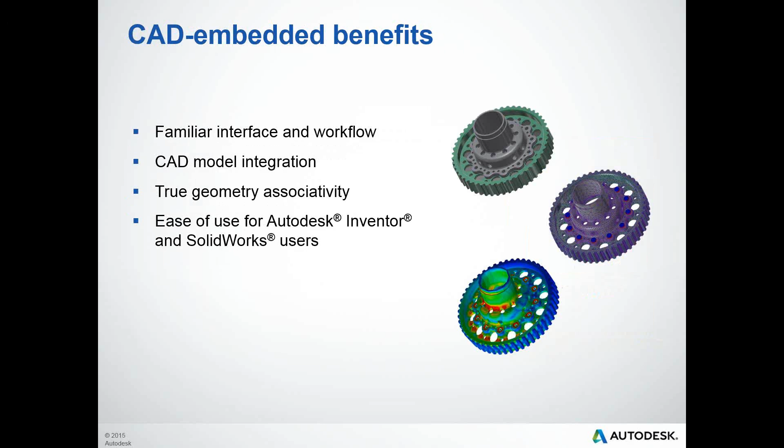Another thing I'd like to point out is the basic analysis capabilities of Nastran. We have analysis types such as linear statics, buckling, normal modes, pre-stress static and normal modes, linear steady state heat transfer, composites, assembly modeling with contact, and thermal stress.

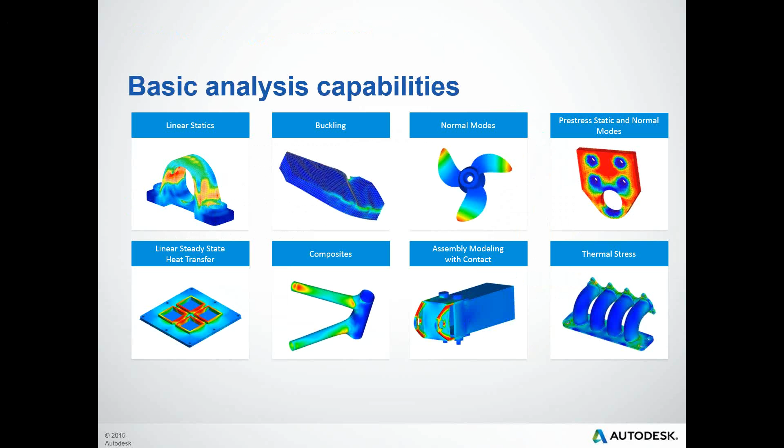In addition to the basic analysis capabilities, we also have some advanced capabilities where we can get into nonlinear statics, nonlinear transient heat transfer, nonlinear steady state heat transfer, random response, frequency response, linear and nonlinear transient response. Then we have some advanced nonlinear and hyperelastic materials, and also automated impact analysis and drop tests.

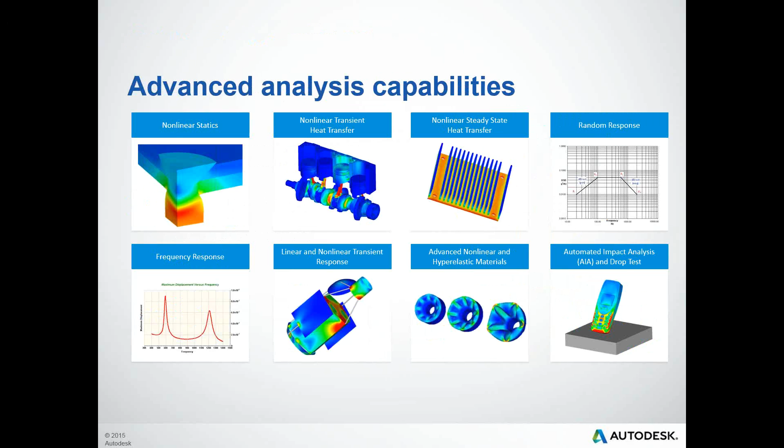So with that being said, for the people familiar with Nastran In-CAD, I want to spend a little bit of time talking about what is new in the 2016 release.

Let's start with moment loads on solid element faces. The moment load now allows you to define on solid element faces. You can apply a face moment on solid element models by selecting a face and entering the magnitude based on the axis of rotation.

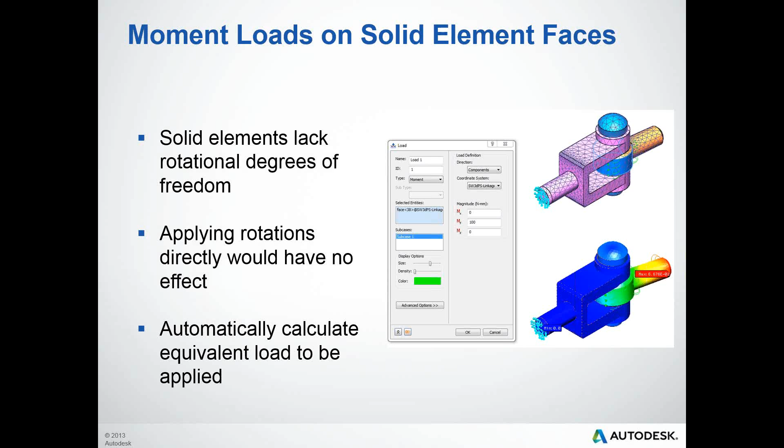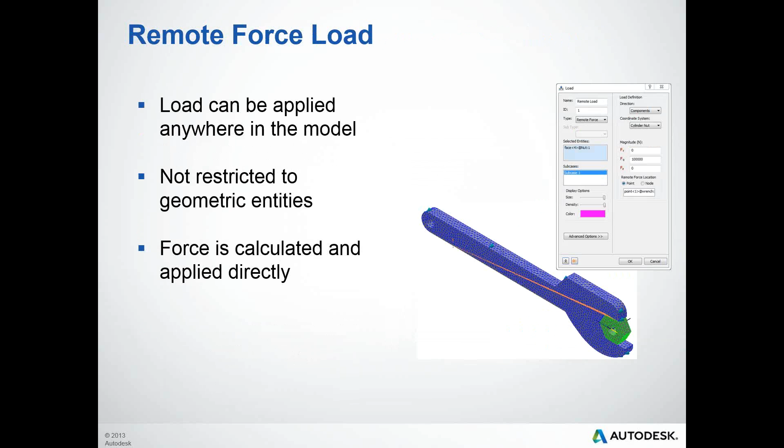Also, in regards to the remote force, which is a force that originates from a point in space, not on the model, you can apply a remote force like you apply force on the model. You can select surfaces to apply a remote force. Regardless of the surface selected, the remote force will be distributed to all its nodes.

Automatic contacts get generated, which takes the geometry contact given in the model tree from Inventor and displays the names of the bodies for much easier understanding of which parts are in contact. This detects the contacts within the tolerance specified in the analysis dialog and the geometry contact set in the model tree.

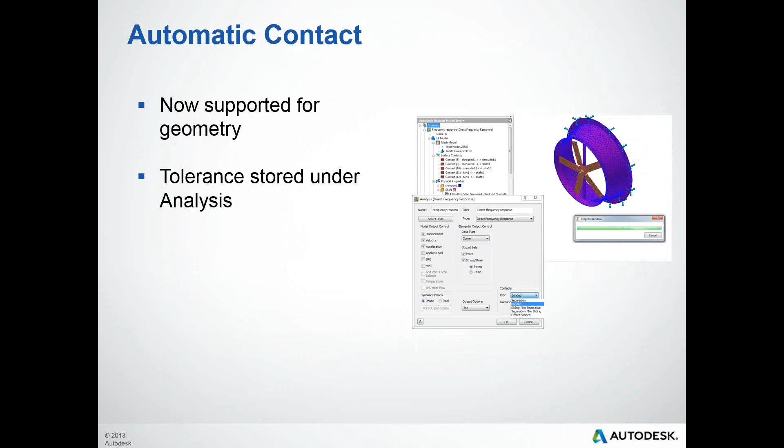We also have some improvements in regards to the meshing progress bar. Now it shows the progress of the surface mesh and the volume mesh, and also the overall progress of the meshing, so we get a nice visual showing us whenever the meshing is being applied.

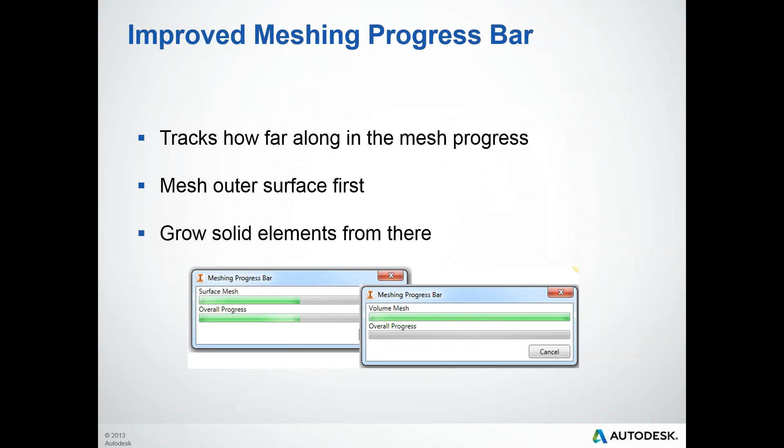Improvements have also been made to the XY plot. In this release, plotting the results with respect to nodal/element distance is now based on coordinate distance with respect to the position selected. You can now filter your results by either selecting nodes or elements.

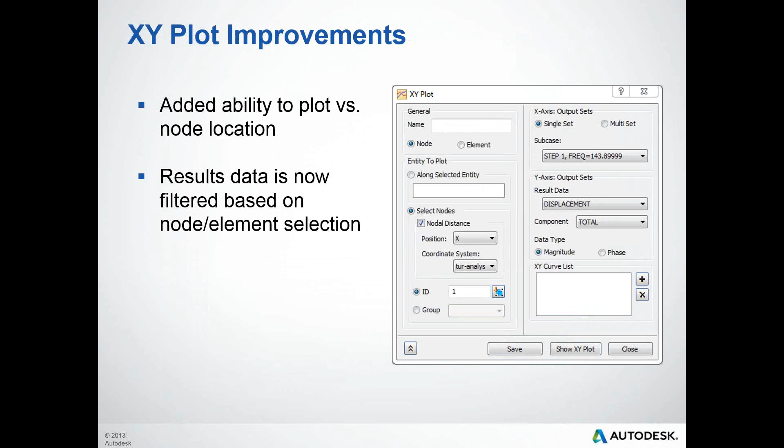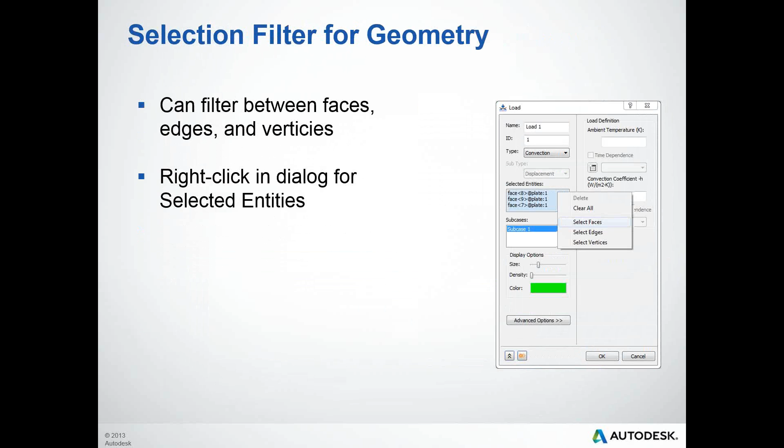Also, selection filters are added at all of the selected entities selection box. So when you right-click at the selection box, you'll notice select faces, select edges, and select vertices are listed. This will make sure that you are setting and selecting only filtered faces, edges, and vertices.

Also, with the release of Service Pack 1, you will notice that the Nastran tab has been moved to the Environment tab. And also with this Service Pack 1, we have some improved performance.

Results probing has been added to the ribbon, and this will become active. You'll notice that whenever you first go into your model, if you don't have the results already loaded, it will be grayed out. Once the results are loaded, it will then become active, so you can go around and probe different areas of your model to see the different results.

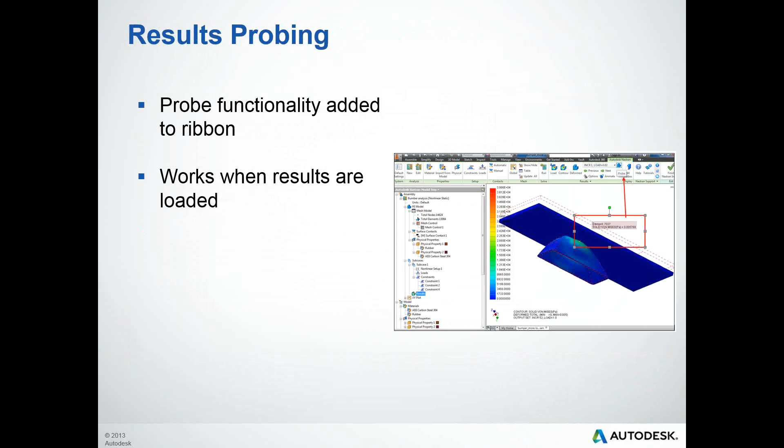Also, on previously solved models, to enable this, the only thing you need to do is go to the default settings underneath post-processing and make sure that automatically load results is checked.

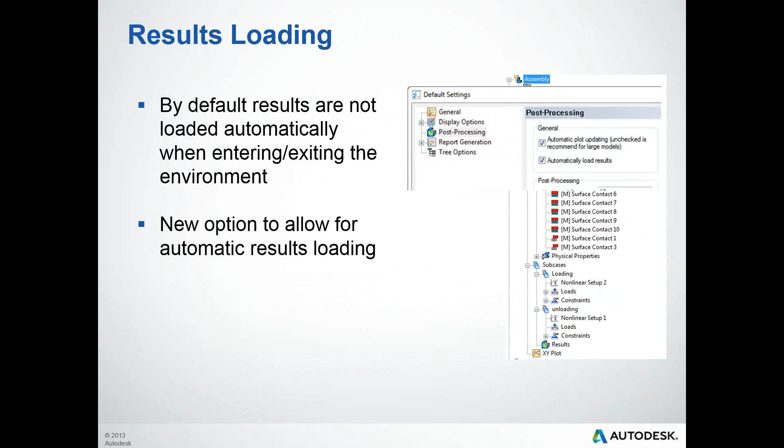Also, in regards to units, there's easy access to define units for the analysis at the browser. You can double-click the units button in the browser tree. By default, that takes the units set from the CAD system, and you also have the option to go in and override any of these settings.

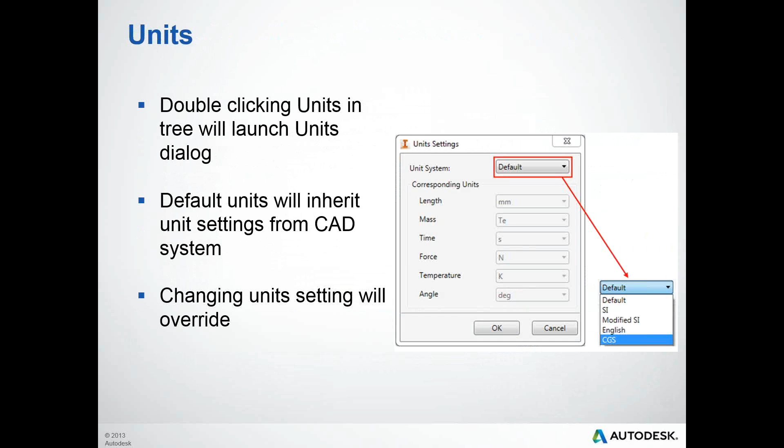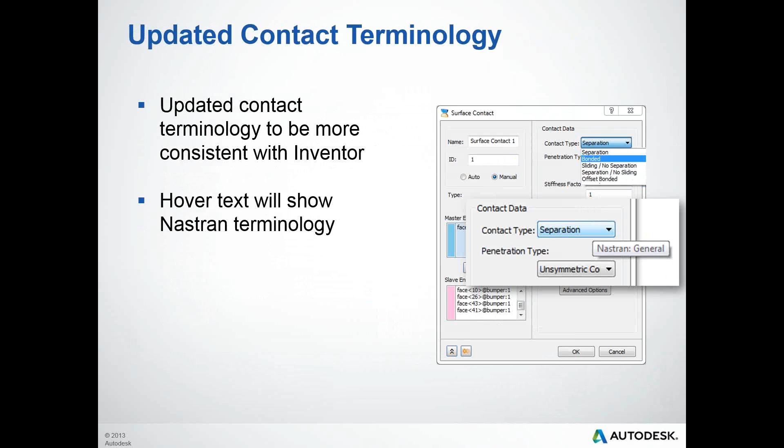Another nice little addition they've made is they've updated the terminology to be more consistent with Inventor. You'll notice that even when you hover over one of these, say any of this terminology, a pop-up will show the actual Nastran terminology.

Now this is a great thing here. The material database of Autodesk Inventor will automatically get loaded whenever you're selecting a material. Also, if you have some custom libraries that you've set up, you can import those as well, whether it be an XML or an SLDMAT file.

You can load those to utilize in Nastran. Another thing they've done is they've enhanced the factor of safety template, so now the scale is automatically reversed to show the lowest factor of safety in red.

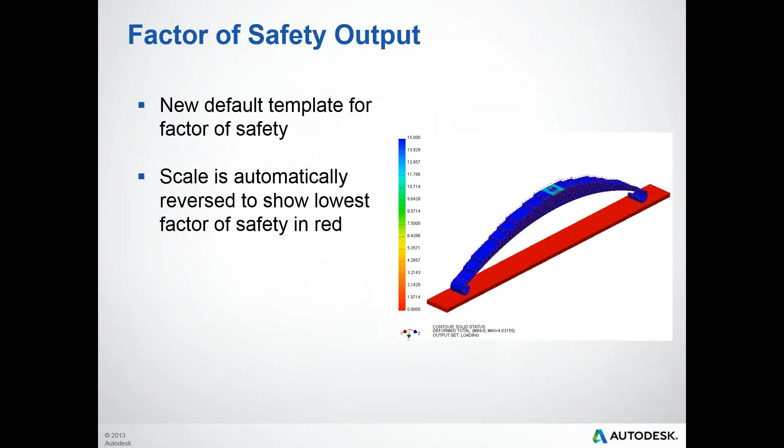Now with those new additions made to the 2016 release, what I'd like to do now is actually jump into Inventor, and let's go through and set up a model in Nastran, and let's see some of the results and the ease of use that Nastran gives us.

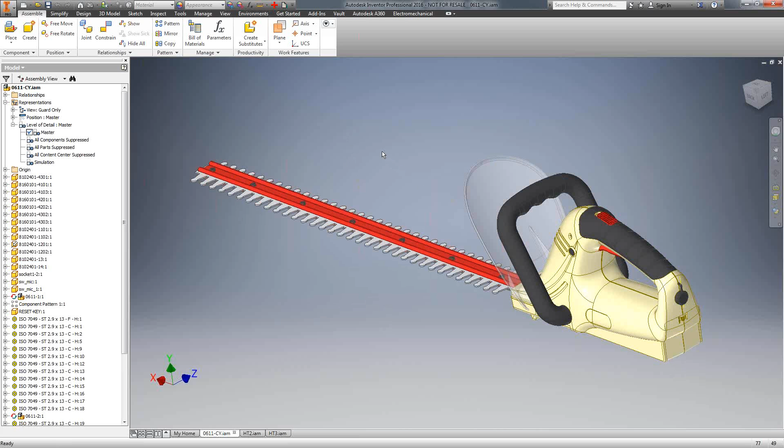Now you'll notice that I have a hedge trimmer, but today what I want to focus on is actually the guard here. This guard is made of a thin plastic, and typical load conditions on the part can cause a large amount of displacement.

So what we're going to end up doing is I'm actually going to perform a non-linear static study so that we can get some high fidelity results.

Now you'll notice that I'm still in Inventor. We have a Nastran ribbon up at the top. So the first thing I want to do is start a new analysis. I'm going to give it a name, and I want to choose the type of analysis we're going to perform. We have a lot of different types to choose from, but for this one, we're going to choose nonlinear static.

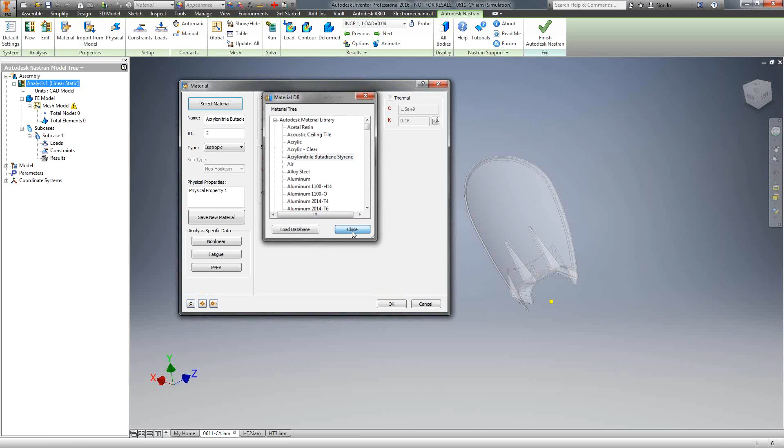Okay, and then I'm going to set up a material, and I'm going to select this material from the Autodesk Material Library. For this particular one, I'm going to choose ABS plastic here. Okay, let's cancel this just for a second.

Guard, static, okay, and let's try this again. Let's see if it's going to let me edit this. There we go. So we got a nonlinear static.

Next, I want to choose my material. Okay, and if I wanted to rename this so we don't have that long name here, I'll just abbreviate it. Okay, and you'll notice in my browser, we have our model and our model tree here.

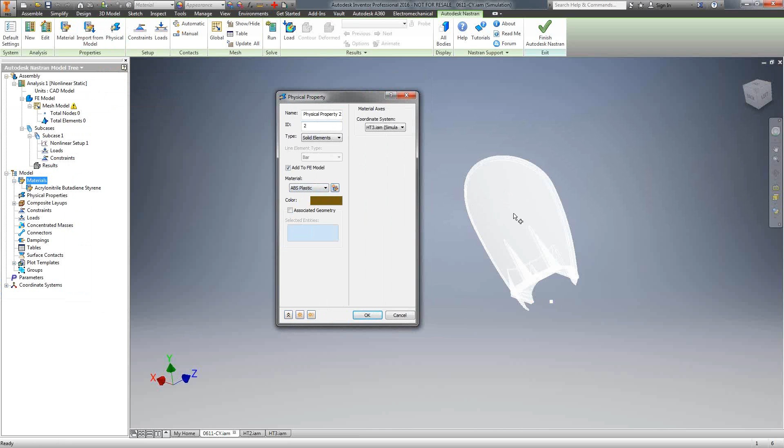Let's go through this. Okay, there we have it. Then next, I want to go to my physical properties. This is where I want to assign that ABS plastic here to my associated geometry, so you'll notice just my guard.

And then also, let's go in here and make sure everything's selected. Okay, all that's set up. And then also, let's go in and edit this here.

Actually, for this one, I want to run a specific nonlinear material data, so I can go here and set the type as plastic. Let's say for this one that I know that this material's yield point is 40 megapascals, and I'm just going to use a simple 2-point curve.

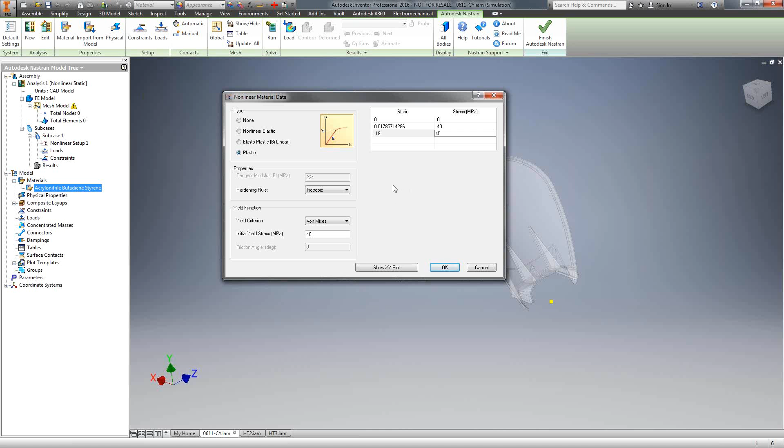And then what I can do here, let's say I'm going to use the two-point curve to define the behavior of the material, and then I can take a look at this two-point curve, and I can notice that the material softens greatly after it reaches its yield point.

Okay, once we have all that set up, the next thing I would want to do is maybe control some of the mesh on the element size, so I'm just going to go ahead and set this to 6.

And then also, the real power of the nonlinear analysis solver is actually, we can take a look at the setup here, and what I can do is define the number of iterations. So what this does is the solver will apply...

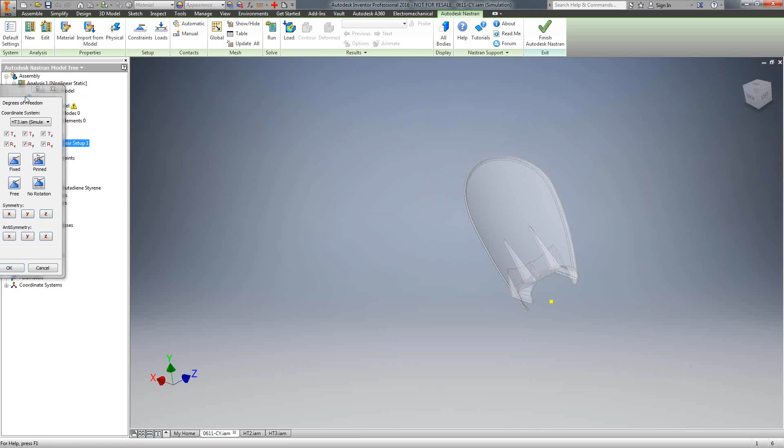...whenever I go in and set up some constraints and loads, it will actually apply, let's say — so we have a real world scenario — where this guard mounts to the trimmer, I'm going to go ahead and fix the bottom here.

So we have those two fixed, and then I want to add a load going to the front of this guard at negative 333 newtons, which is going to be somewhere around 75 pounds.

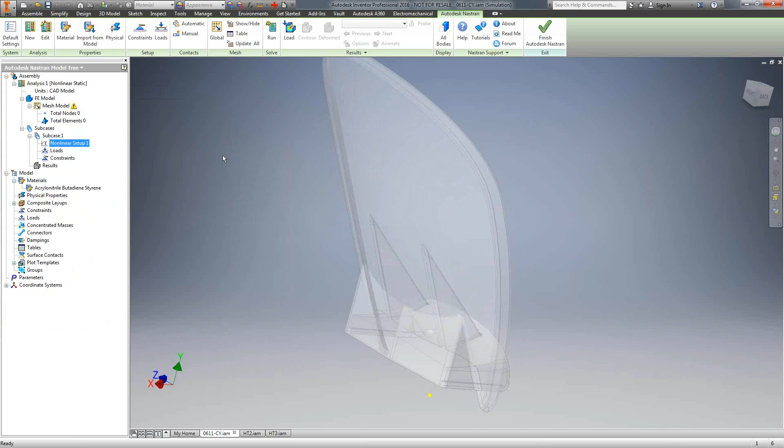Okay, now once we have those set up, for the sake of time, I've already run this, so I'm going to go ahead and load my results. Let's finish this one here. I'm just going to open up the guard.

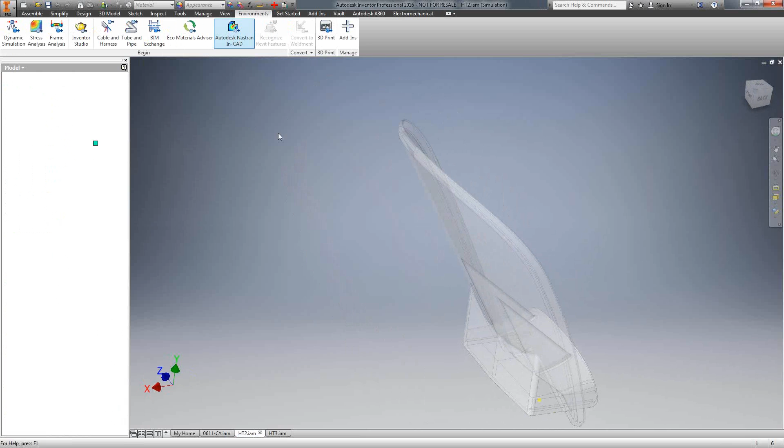Okay, we'll notice the loads that I've set up—I have them actually showing visibly here on this model. And let's go in and see what we can do here.

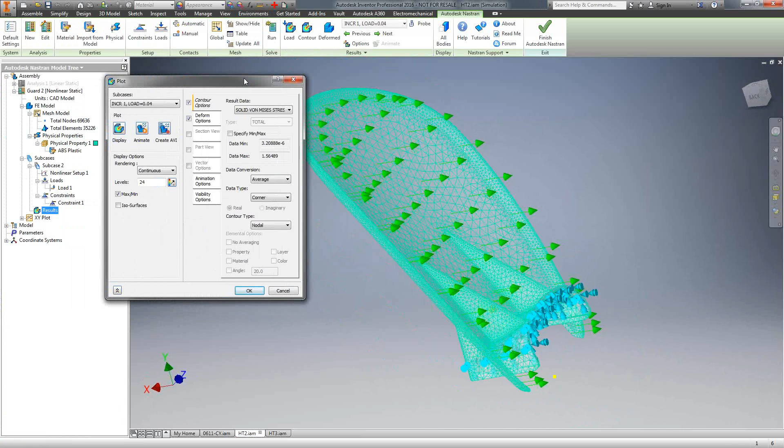So I ran it at 25 increments. You can notice I can go through any of those increments to see how the model is being affected. So I'm going to go ahead and go to increment 25, and I'm going to turn off some of the visibility here.

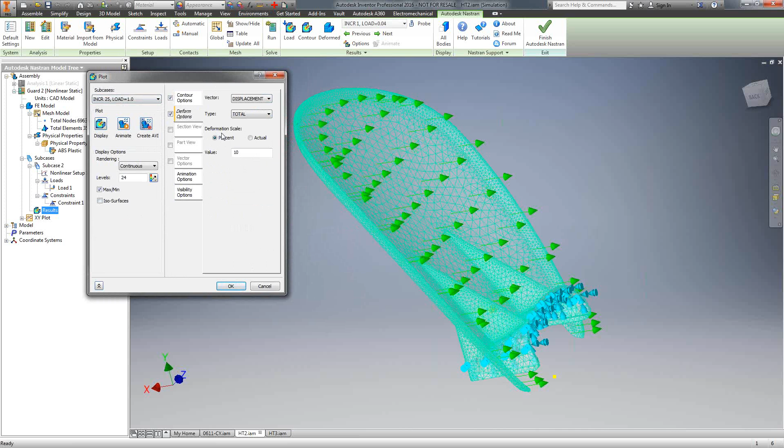Now, one thing I can do is actually show the displacement, and you'll note the deformation scale is 10% more. So if I display that, you can see right now that I'm seeing my max, and it's over what my yield point needed to be. So we're at 43. Also, I have the capability of animating this.

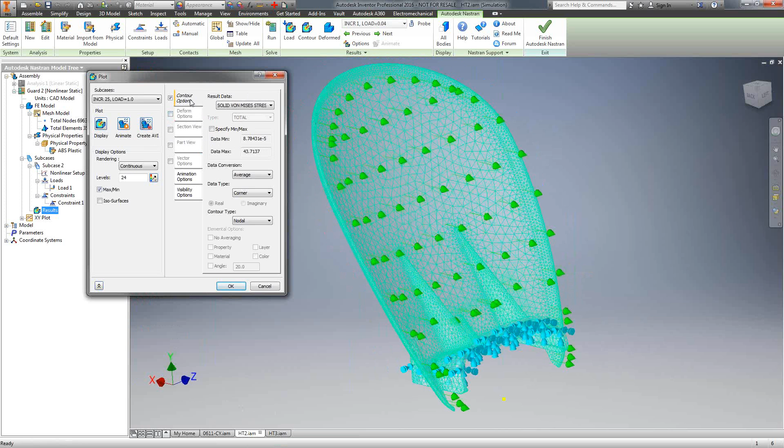All right, let's stop this here and let's look at some of the von Mises stresses here. So we can see where we have some of the high stress out here.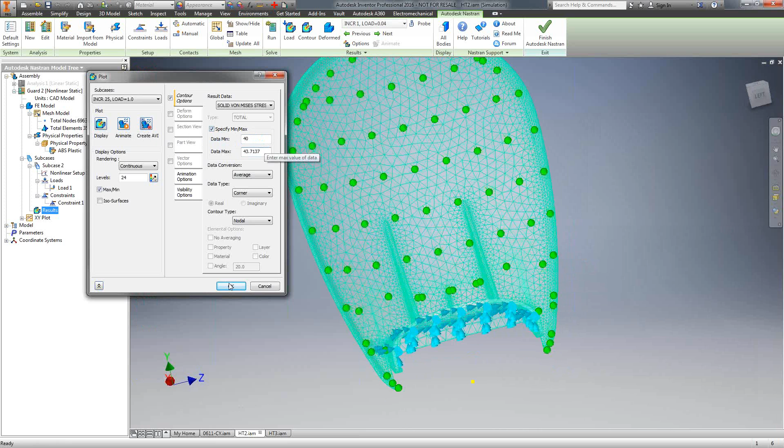Now, if I wanted to, I could come in here and specify the min and max. Maybe I wanted to see where the min was of 40. And let's display that.

So you'll notice we got a min of 40 down here, but also we still see that more highlighted area where the max is.

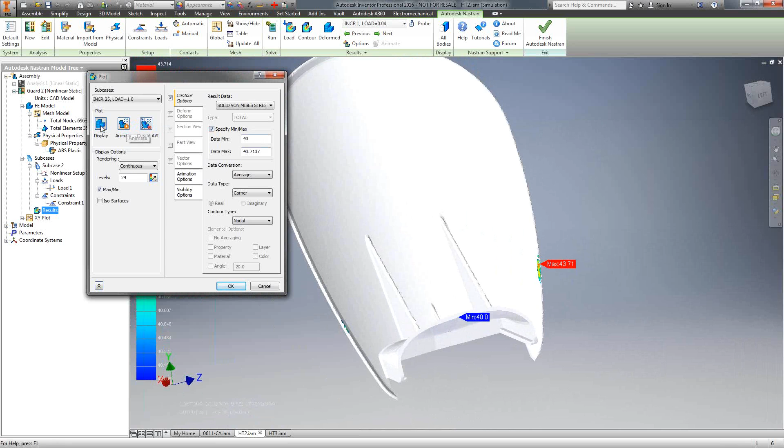Let's try this animation again here. All right, let's take this off.

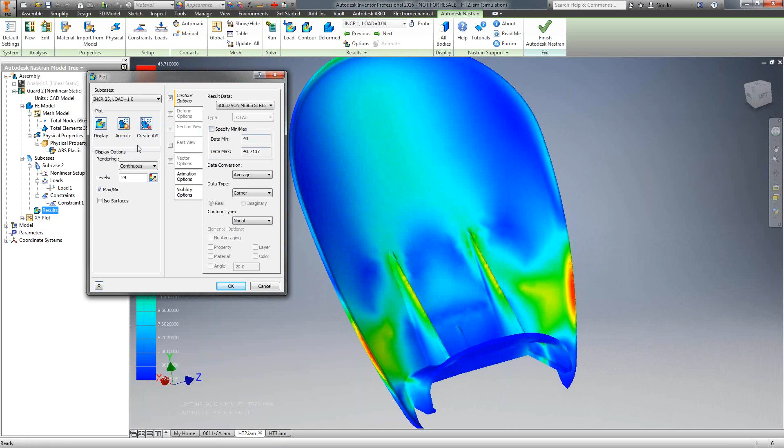Looks like I'm having a little bit of difficulty here. It's not showing the animation. But let's go ahead and continue here.

So let's think about this. I'm over my setting that I initially set up for 40 on the yield. So let's say, what could we do to fix this?

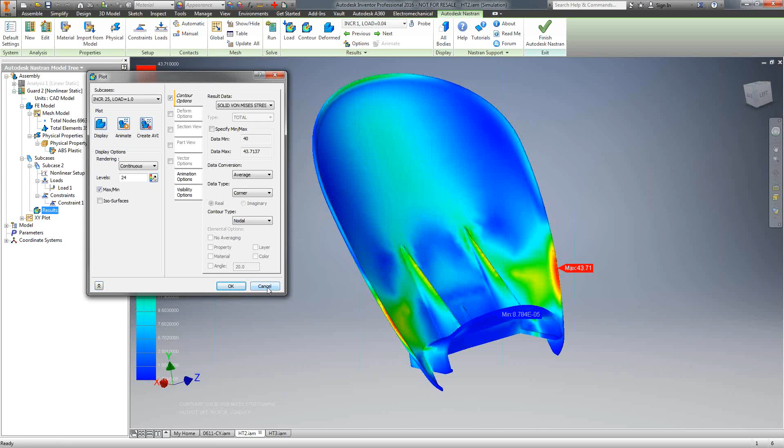So possibly I could go in and modify the ribs, maybe change the material, or maybe the overall thickness of the part in general. But for this particular one, what I ended up doing was actually going into this model and changing the degree of this rib.

So for instance, it was 40. And let's go ahead and close out of this one, and let's close out of this one as well.

Okay, you'll notice here, just as if I would finish in Autodesk Nastran In-CAD, go back to my model. And for this one, let's go ahead and take a look at the sketch that I actually modified.

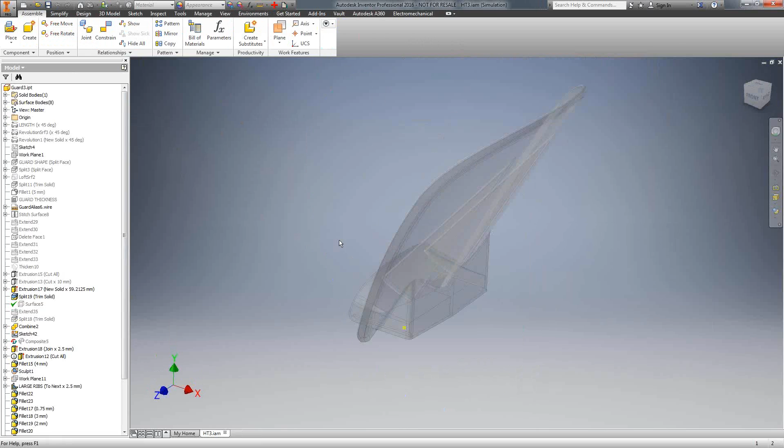So it's for the large ribs. And this on the initial analysis was 40, and I changed it to 50. You'll notice that the ribs became a little bit longer.

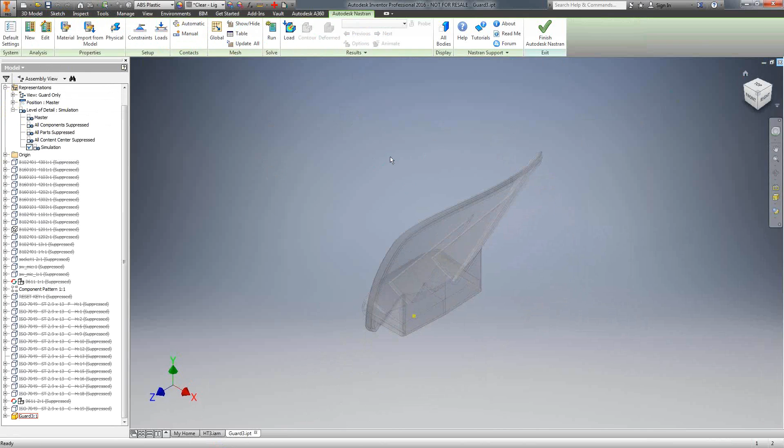So let's go ahead back into our Nastran. Let's close out of this. Give it a second to load. There we go. All right.

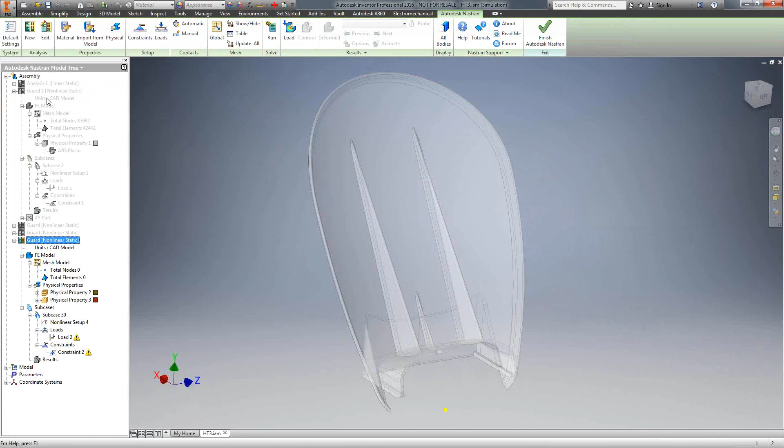So here, let's go ahead and I'm going to set this as active, and let's see the results that we have here. If I go down to my increment of 25, I'm going to see right now that I'm already underneath my yield. So let's see what we have.

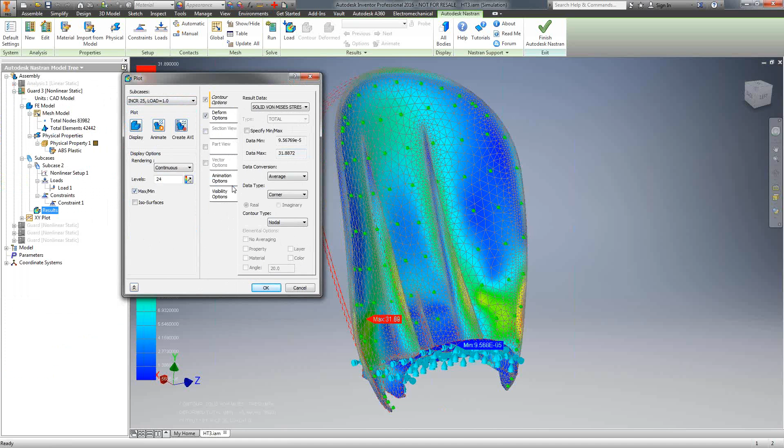And let's turn off some of these so we can get a better representation. I'm going to turn this off.

So you notice now our max is 31.89. Just by changing the angle of my rib, it made it a little bit stronger here with the 75 pounds, or 333 newtons, coming in on the front.

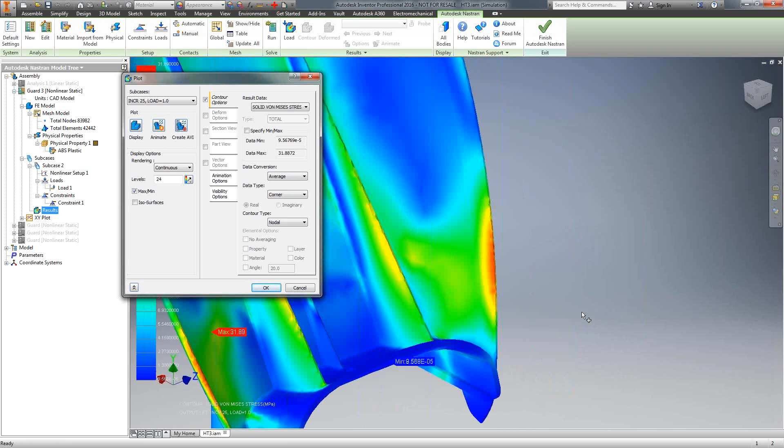Okay, and then I also have the option, if I want to come in here and maybe probe at certain areas, I can do that as well.

Let's go ahead and I'm going to try something here. There we go—that might have been the reason there.

So let's go back here and try this again, because I really want to see that animation, because I can take that animation and then export it out as some kind of AVI that you can play through your video player.

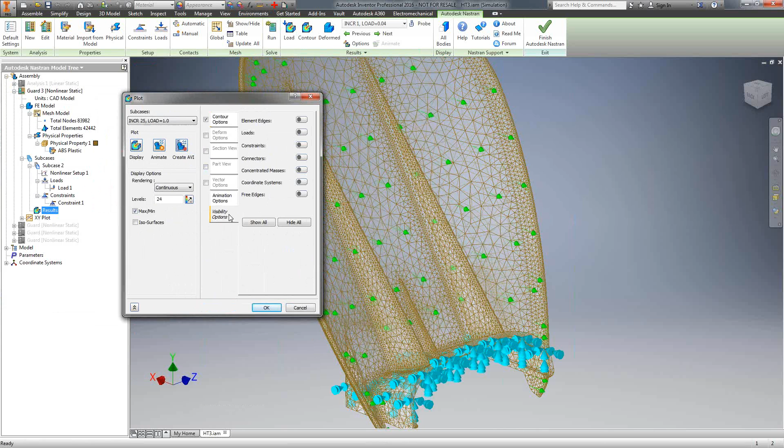Well, it looks like not today. All right, so let's try something here because I really want everyone to see that.

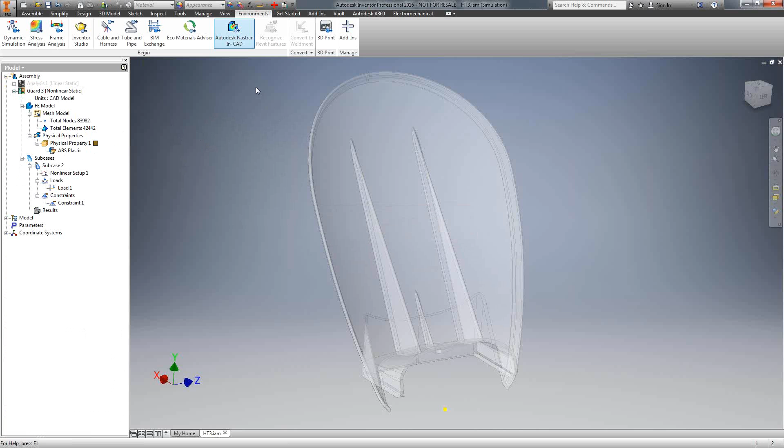There we go, that's starting to look a little bit better. All right.

Let's hide all these. Looks like I'm having some technical difficulties, but we got to where we wanted to see the different min and max by making a... there we go.

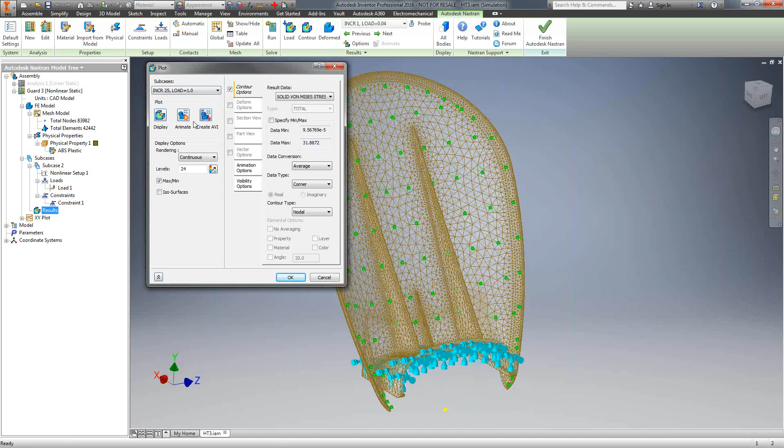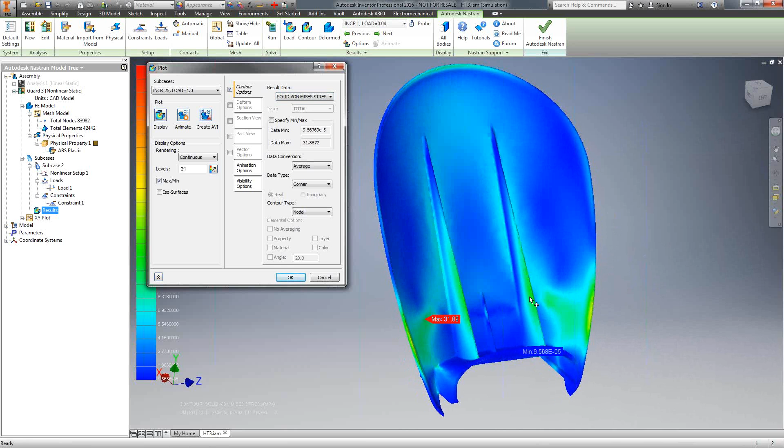So we can see here with this animation, as it's going through each increment, you can see where the stress is, because I'm showing the results of the von Mises stress as that load is being applied. So this can give us some good data on possibly some of the design changes that I might need to make, maybe play around with different materials or different thicknesses. I could have possibly actually just thickened maybe these ribs in here, but it's stuff that this software gives us the capability of going through and testing.

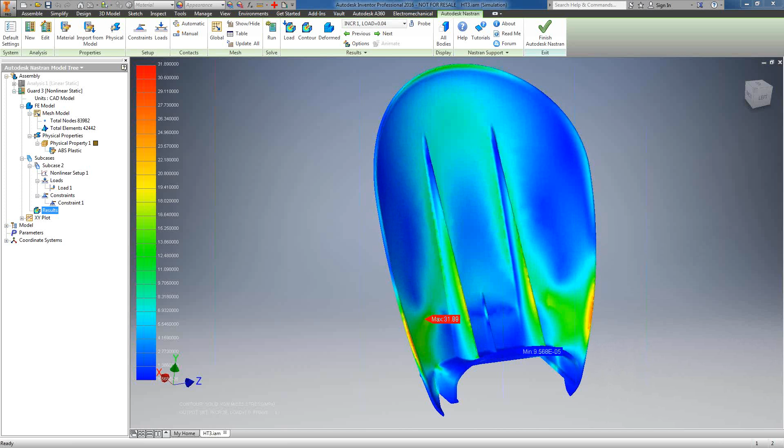Right, and Nastran will do 85 to 90% of simulation. Not real sure what your product is that you manufacture, but oftentimes simulation, CFD, or FEA is when you really have a research and R&D department, and the guys are in the little white coats too.

Colin wants to know, what about the quality of results of static stress analysis between these two products? Just the static stress, those are pretty much the same, since Inventor and Nastran can perform both of those. It's the same. We really get the powerfulness of the tool by doing things like the thermal studies and also the nonlinear studies.

Right, yes. Now also, Nastran's solver is not the same solver that is used in... or is it? It is the same solver, isn't it, as Inventor? No, it's different. No, they're different solvers. Yeah, okay, right. Okay, all righty.